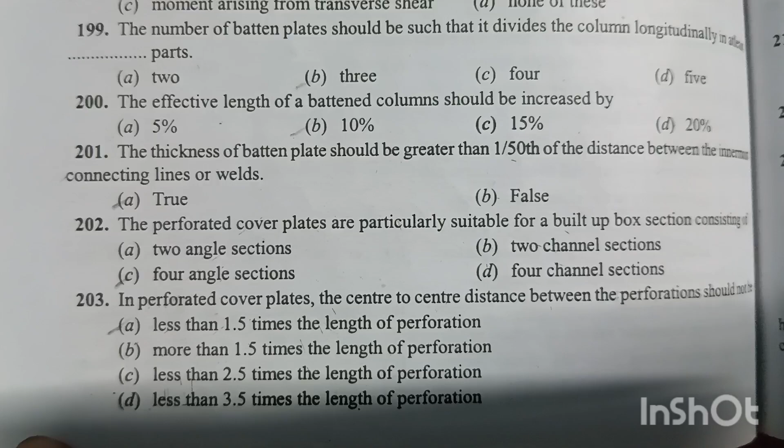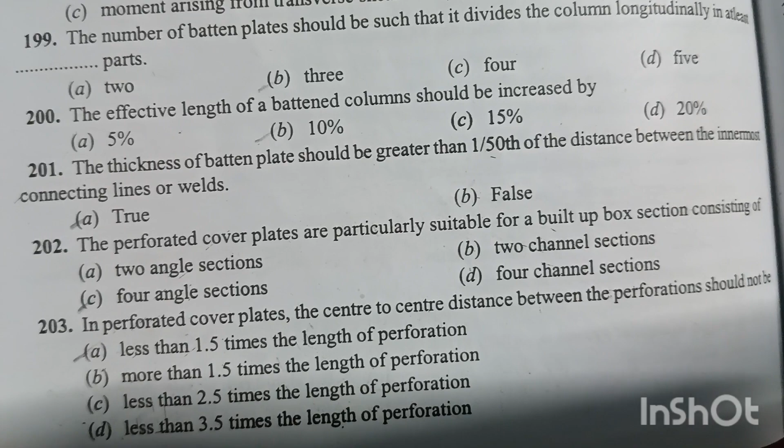Question number 201. The thickness of batten plate should be greater than 1/50th of the distance between the innermost connecting lines or welds. Option A is the right answer, true.

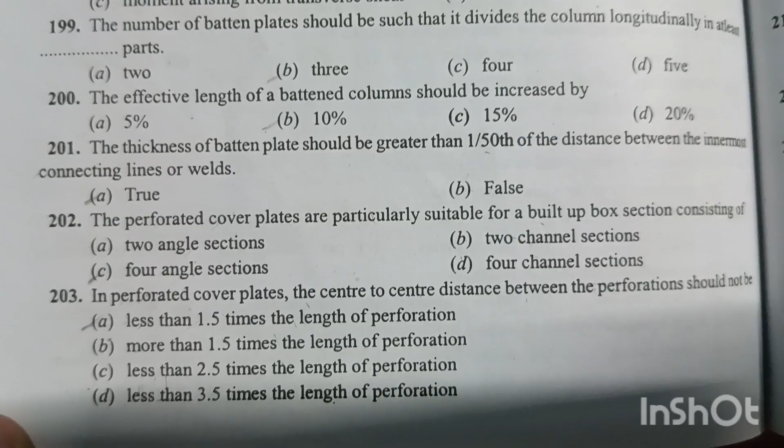Question number 202. The perforated cover plates are particularly suitable for a built-up box section consisting of 4 angle sections. Option C is the right answer.

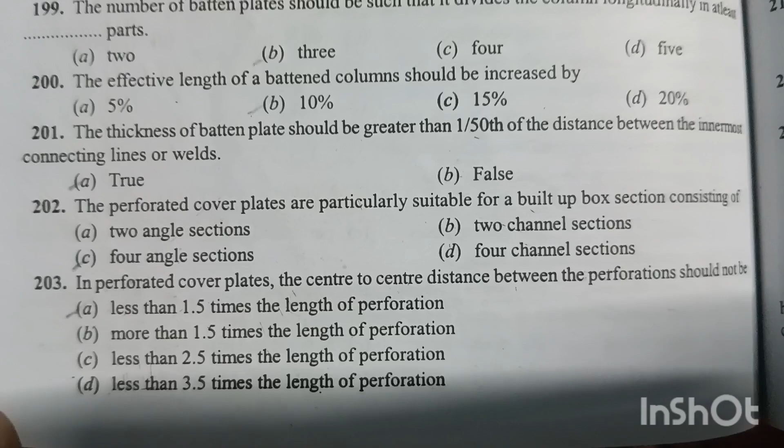Question number 203. In perforated cover plates, the center to center distance between the perforations should not be less than 1.5 times the length of perforation. Option A is the right answer.

Question number 204. An eccentrically loaded column is subjected to bending stress as well as direct stress. Option A and B both are correct, so option D is the right answer.

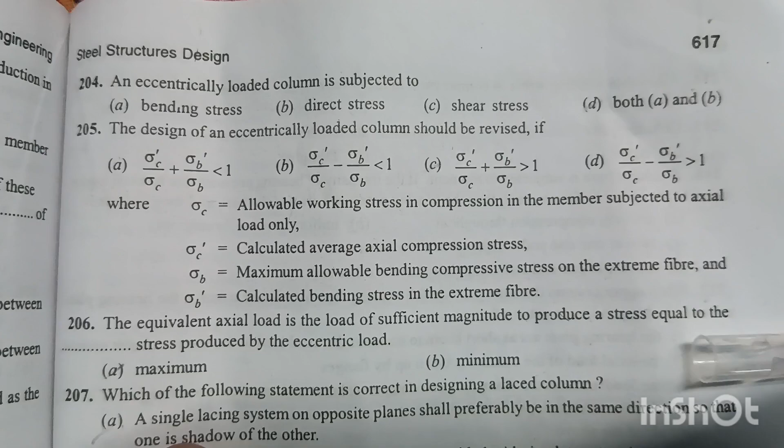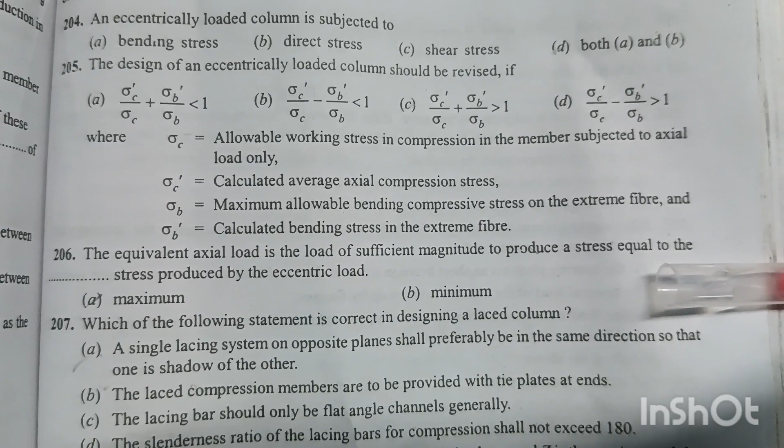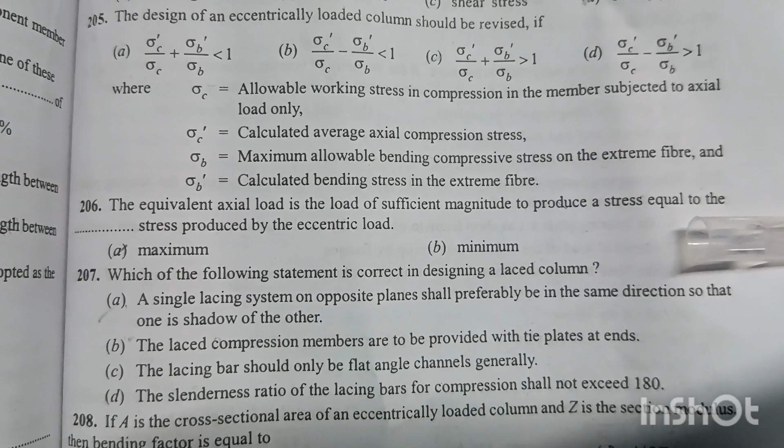Question number 205. The design of an eccentrically loaded column should be revised if sigma c dash divided by sigma c plus sigma b dash by sigma b is greater than 1, where sigma c is the allowable working stress in compression in the member subjected to axial load only, sigma c dash is the calculated average axial compression stress, sigma b is the maximum allowable bending compressive stress on the extreme fiber, and sigma b dash is the calculated bending stress in the extreme fiber. Option C is the right answer.

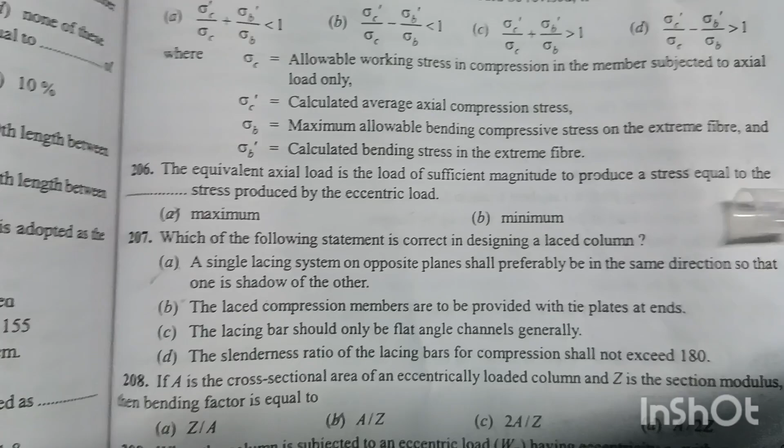Question number 206. The equivalent axial load is the load of sufficient magnitude to produce a stress equal to the maximum stress produced by the eccentric load. Option A is the right answer.

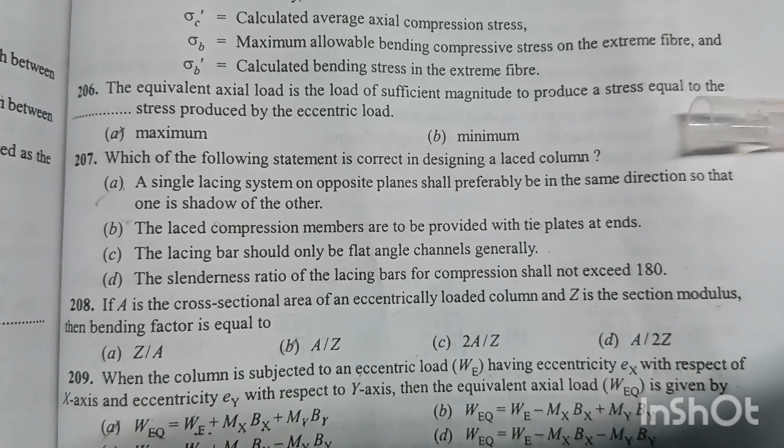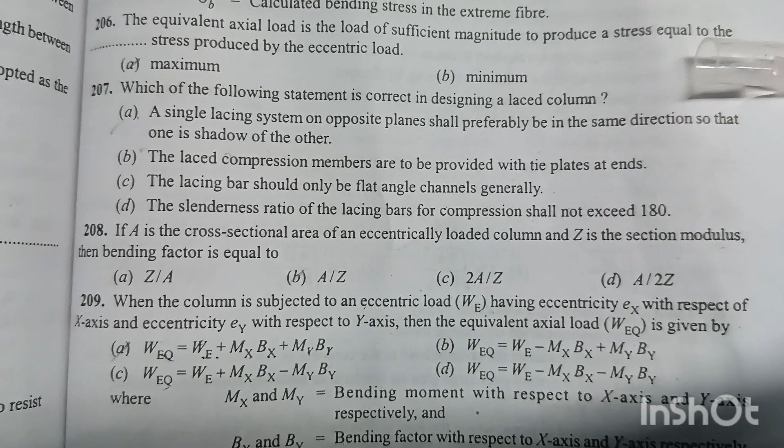Question number 207. Which of the following statements is correct in designing a laced column? Option A: a single lacing system on opposite planes shall preferably be in the same direction so that one is shadow of the other. Right. Option B: the laced compression members are to be provided with tie plates at the ends, to avoid slipping of the lacing bars. Right.

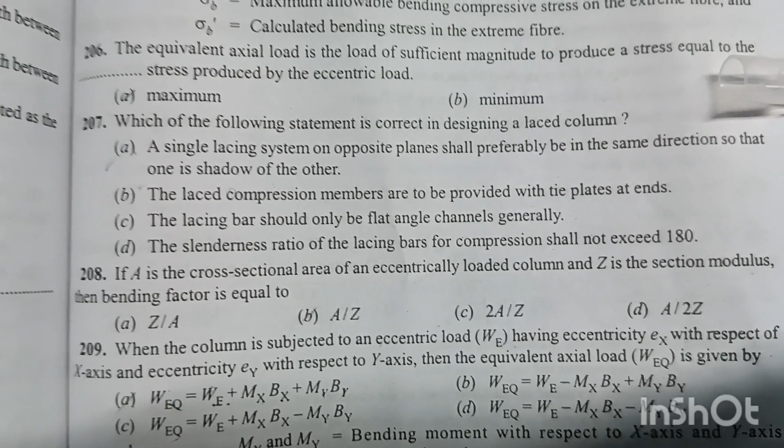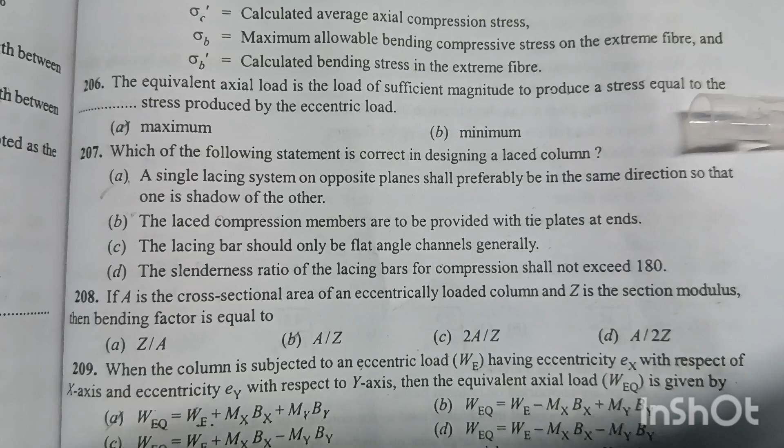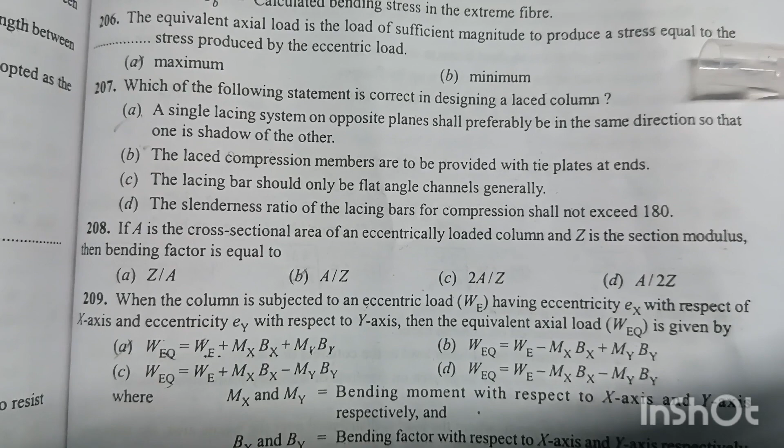Option C: the lacing bar should only be flat angle channel generally. No, it should be flat section, so C is wrong. Option D: the slenderness ratio of the lacing bar for compression shall not exceed 180. No, it shall not exceed 145. So both option A and B are correct.

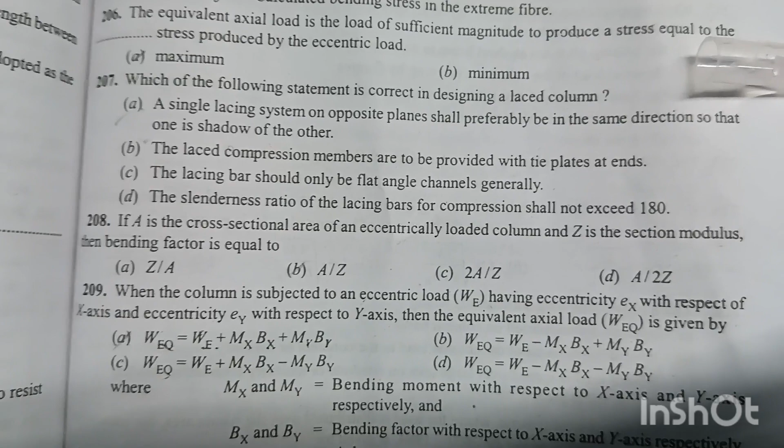Question number 208. If capital A is the cross-sectional area of an eccentrically loaded column and capital Z is the section modulus, then bending factor is equal to capital A by capital Z. Option B is the right answer.

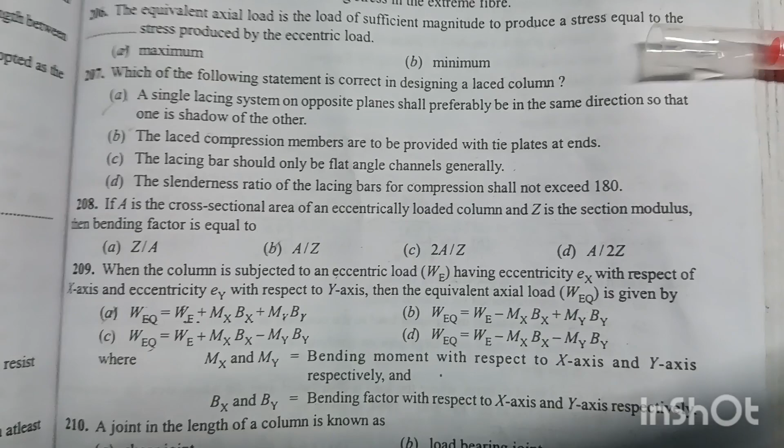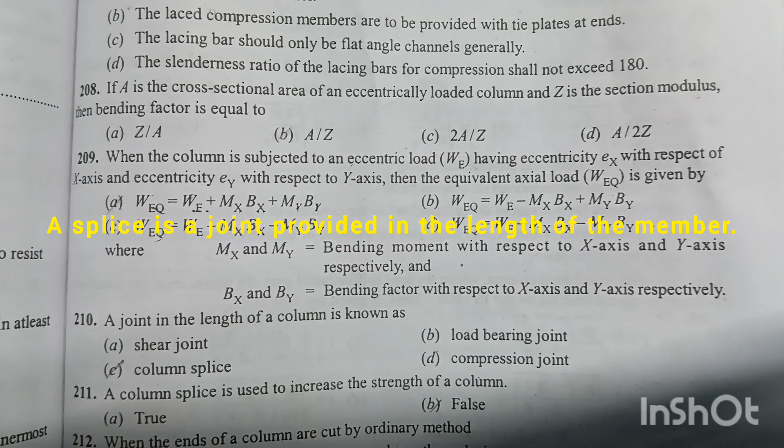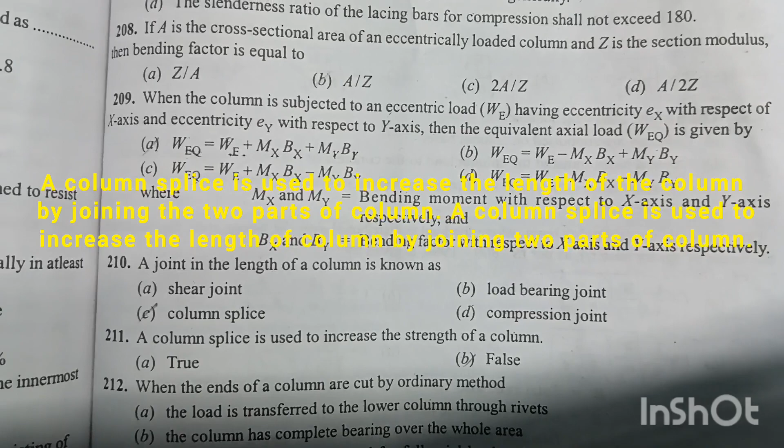Question number 209. When the column is subjected to an eccentric load capital WE having eccentricity EX with respect to x-axis and eccentricity EY with respect to y-axis, then the equivalent axial load WEQ is given by WEQ equal to WE plus MX BX plus MY BY. Option A is the right answer, where MX and MY are the bending moments with respect to x-axis and y-axis respectively, and BX and BY are the bending factors with respect to x-axis and y-axis respectively.

Question number 210. A joint in the length of a column is known as a column splice. Option C is the right answer.

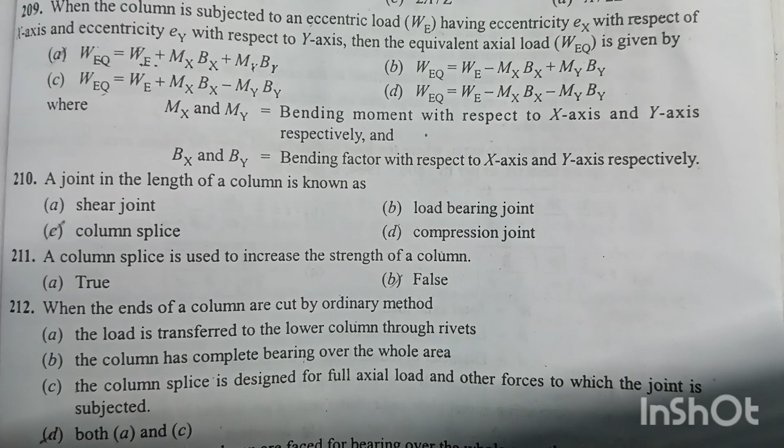Question number 211. A column splice is used to increase the strength of a column. No, a column splice is used to increase the length of the column by joining two parts. Option B is the right answer, false.

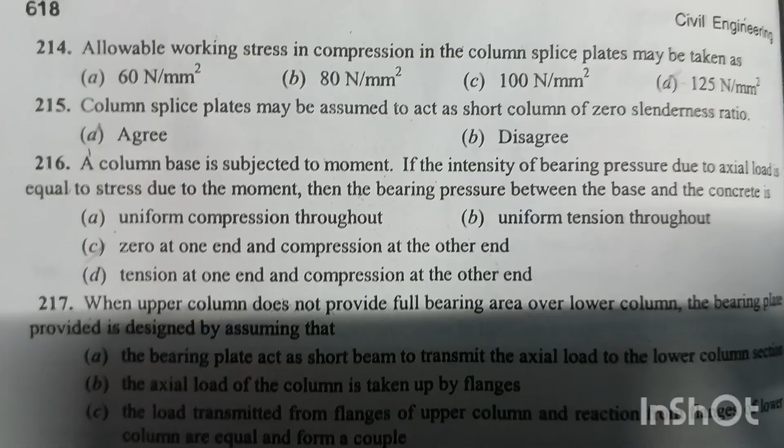Question number 212. When the ends of a column are cut by ordinary method, the load is transferred to the lower column through rivets, and the column splice is designed for full axial load and the other forces to which the joint is subjected. Both option A and C are correct, so option D is the right answer.

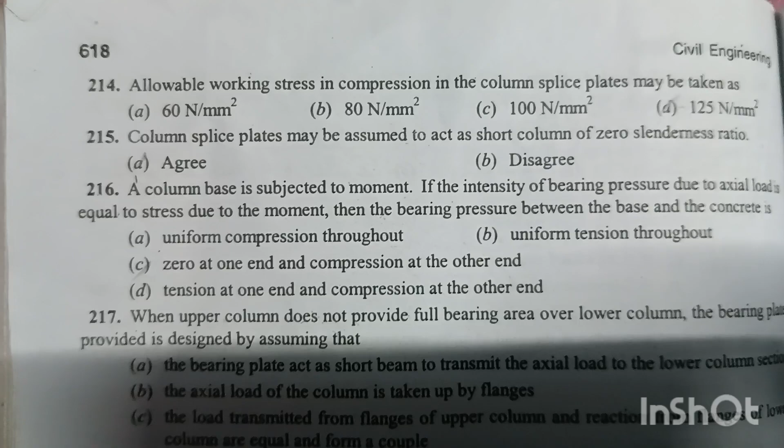Question number 213. When the ends of the column are faced for bearing over the whole area, the rivets essential to hold the connected members are designed for 50% axial load and other forces acting on the column. Option A is the right answer.

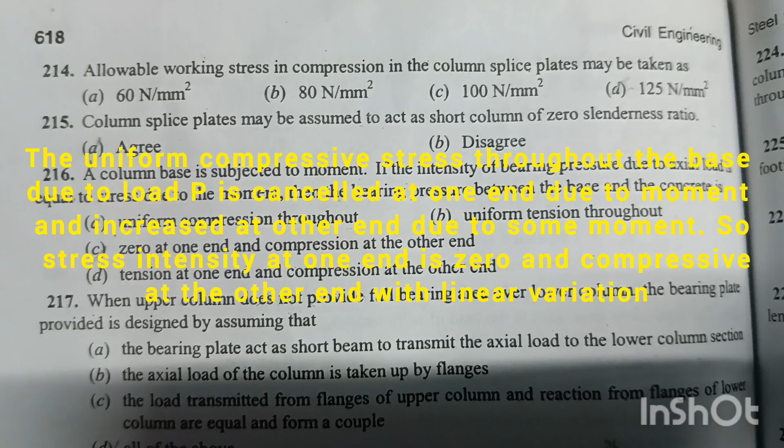Question number 214. The allowable working stress in compression in the column splice plates may be taken as 125 Newton per millimeter square. Option D is the right answer.

Question number 215. The column splice plates may be assumed to act as a short column of zero slenderness ratio. Option A is the right answer, agree.

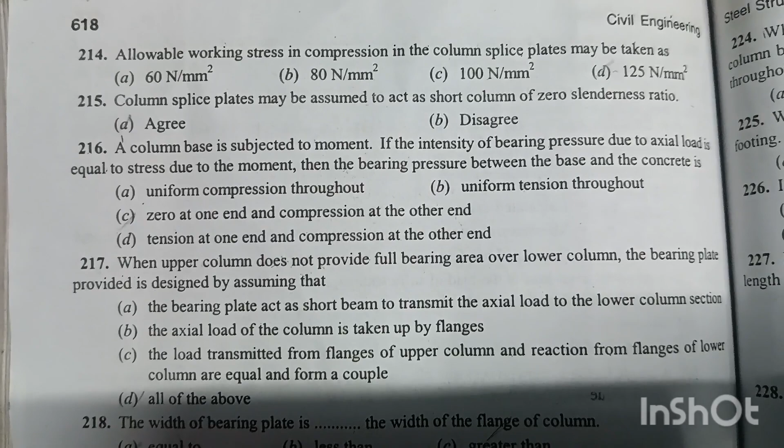Question number 216. A column base is subjected to moment if the intensity of bearing pressure due to axial load is equal to stress due to moment. Then the bearing pressure between the base and concrete is 0 at one end and compression at the other end. Option C is the right answer.

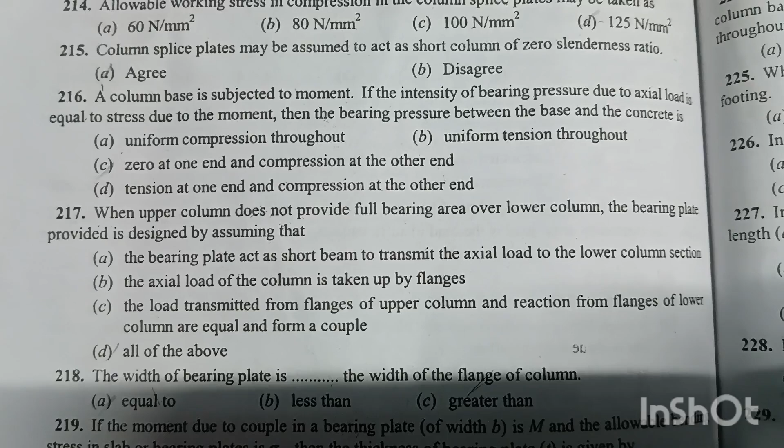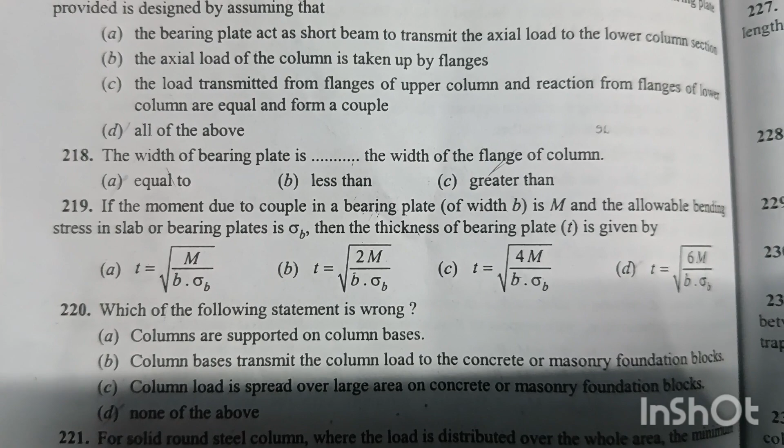Question number 217. When the upper column does not provide full bearing area over the lower column, the bearing plate provided is designed by assuming that the bearing plate acts as a short beam to transmit the axial load to the lower column section, and the axial load of the column is taken up by the flanges, and the load transmitted from the flanges of the upper column and the reaction from the flanges of the lower column are equal and form a couple. Option D is the right answer, all of the above.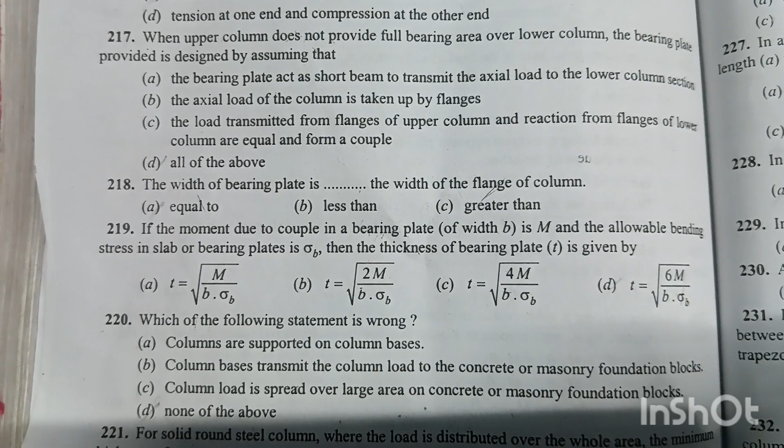Question number 218. The width of the bearing plate is equal to the width of the flange of the column. Option A is the right answer. Question number 219.

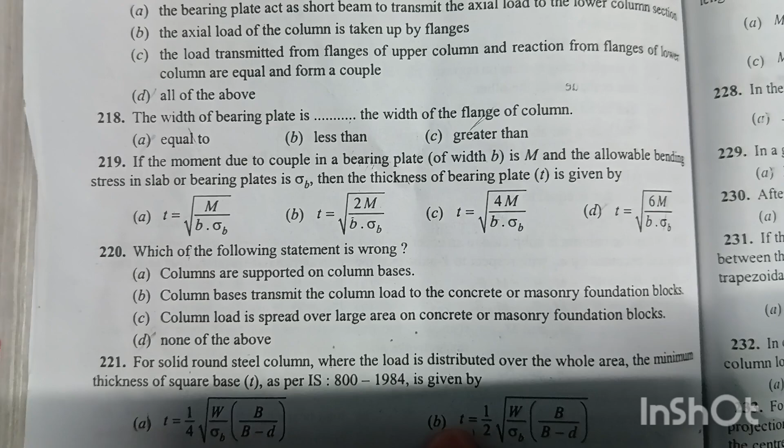If the moment due to couple in a bearing plate of width B is capital M and the allowable bending stress in a slab or bearing plate is sigma B, then thickness of the bearing plate small t is given by. Option D is the right answer: small t equals root over of 6 into M divided by small b into sigma b.

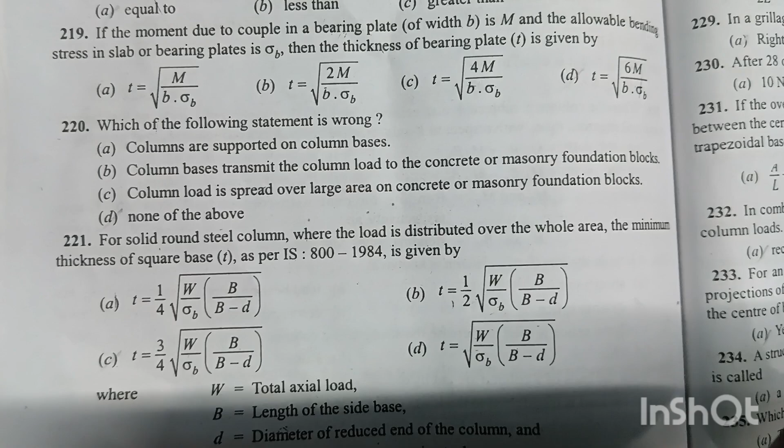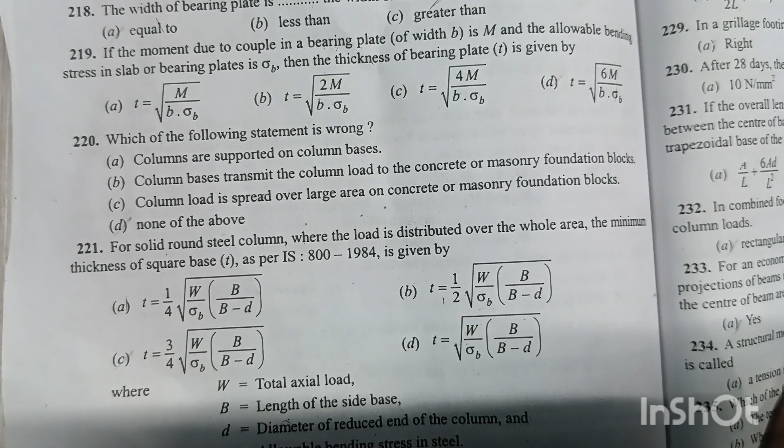Question number 220. Which of the following statement is wrong? Option A: Columns are supported on column bases - right. Option B: Column bases transmit the column load to the concrete or masonry foundation blocks - right. Option C: Column load is spread over large area on concrete or masonry foundation blocks - right.

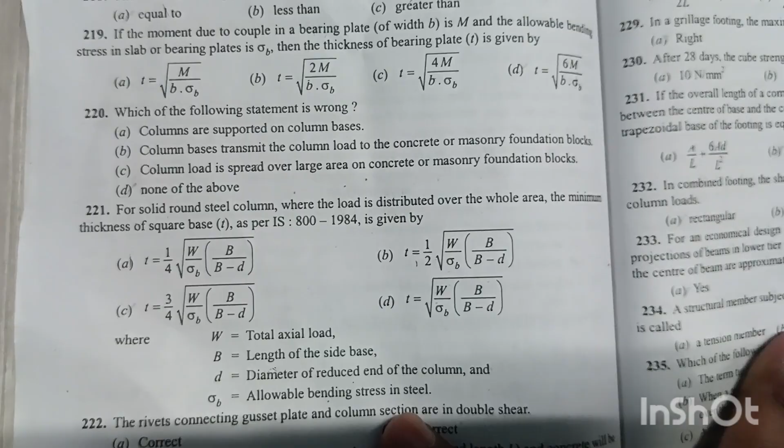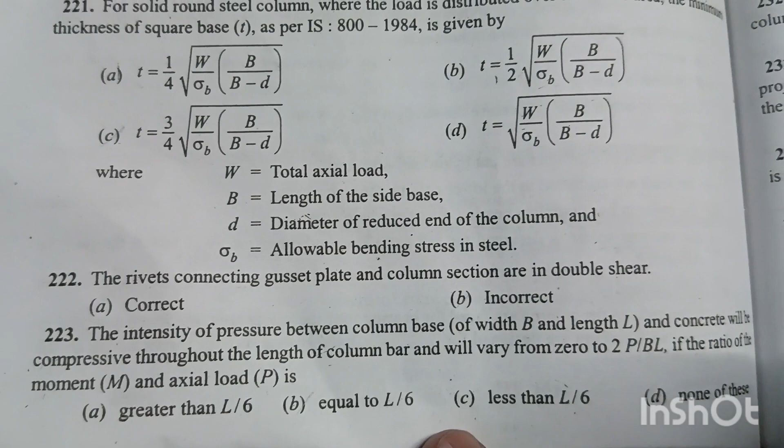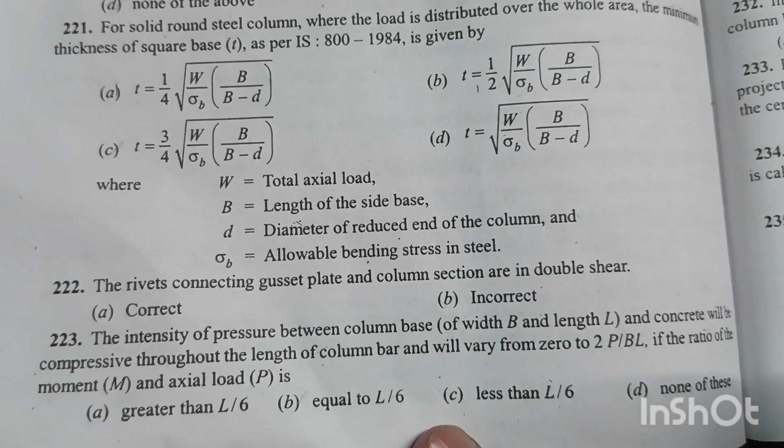Option D is the right answer, none of the above. Question number 221. For solid round steel column where the load is distributed over the whole area, the minimum thickness of square base small t as per IS 800 1984 is given by. Option C is right answer: small t equals 3 by 4 into root over of capital W by sigma b into within bracket capital B divided by capital B minus small d, where capital W is the total axial load, capital B is the length of the side base, small d is the diameter of the reduced end of the column, and sigma B is the allowable bending stress in steel.

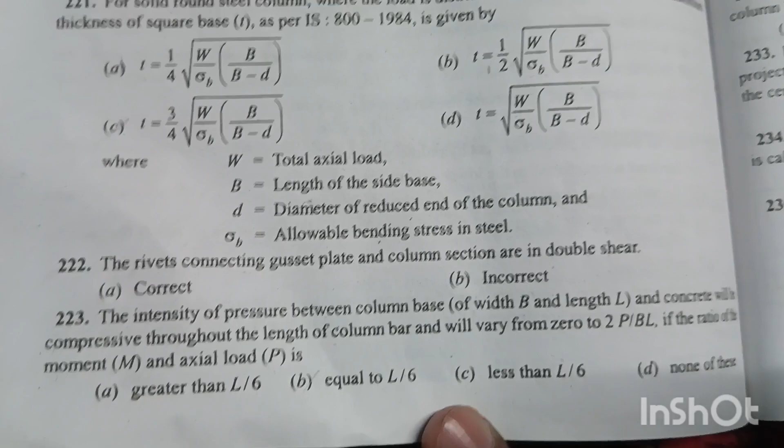Question number 222. The rivets connecting gusset plate and column section are in double shear. Option B is right answer, incorrect.

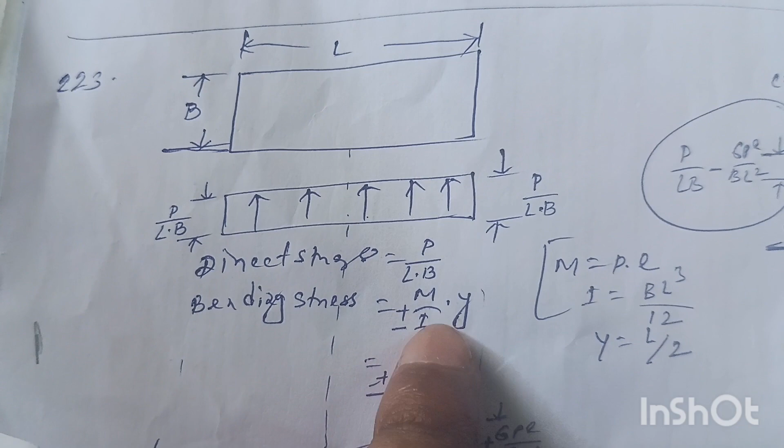Question number 223. The intensity of pressure between the column base of width capital B and length capital L and concrete will be compressive throughout the length of the column base and will vary from 0 to 2 into P divided by BL if the ratio of the moment capital M and axial load capital P is equal to capital L by 6. Option B is the right answer.

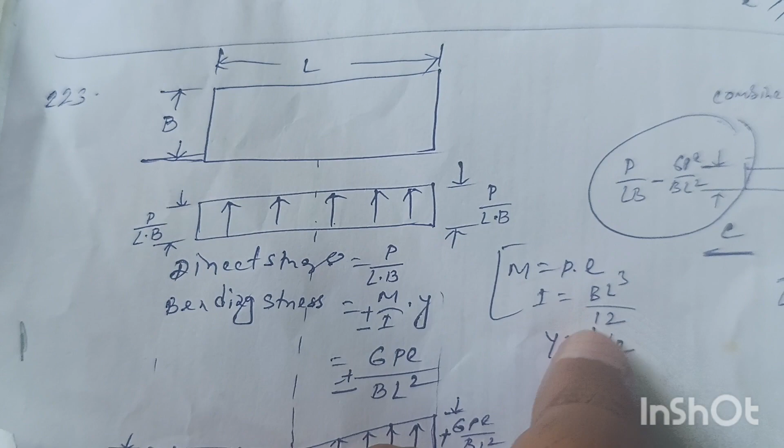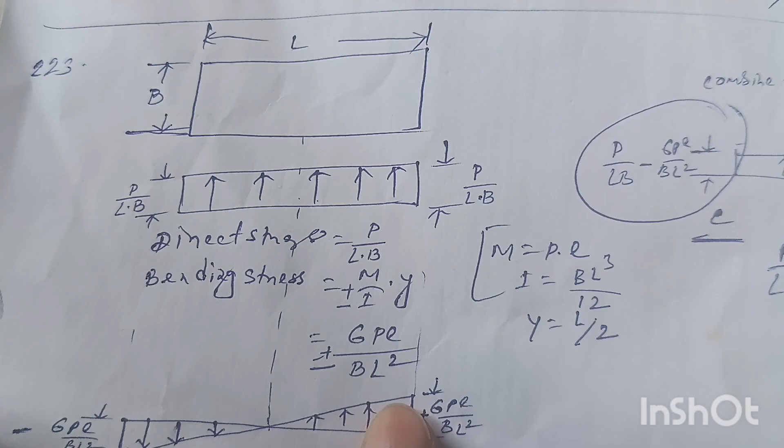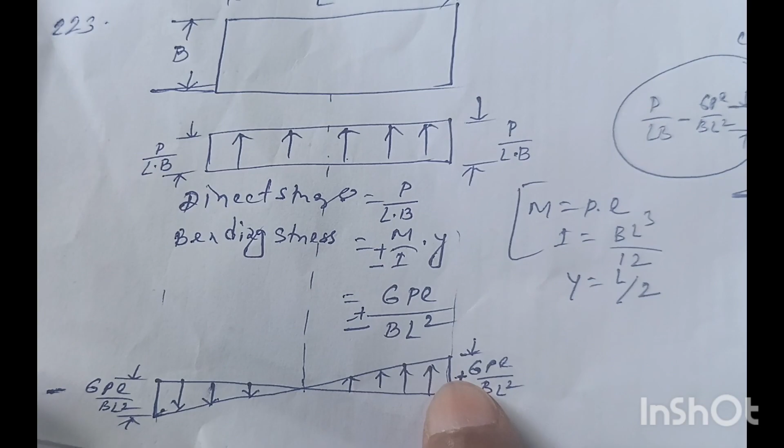Suppose this is the column base of width B and length L subjected to loading P. The direct stress will be P by L into B. The bending stress will be M into Y divided by I, plus minus. M will be equal to load into eccentricity, P into E, and I will be equal to B into L cube by 12, and Y equal to L by 2. So bending stress will be plus minus 6PE divided by BL square.

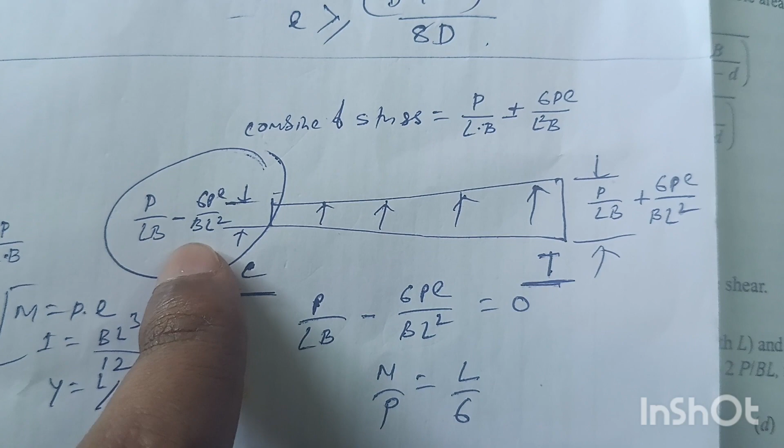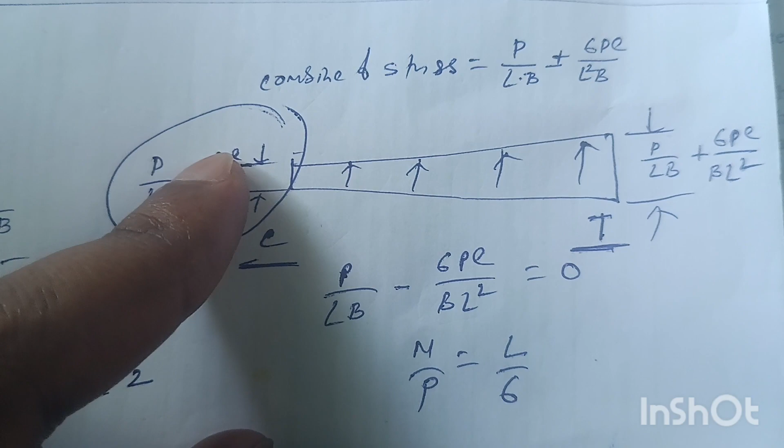If we draw the bending stress diagram, it will be like 6PE by BL square, minus here, and plus 6PE by BL square positive here. The combined stress will be P by L into B plus minus 6PE by L square B, and the diagram will be trapezium shaped. So here the stress value will be P by L into B minus 6PE by BL square, and here the stress value will be P by L into B plus 6PE by BL square.

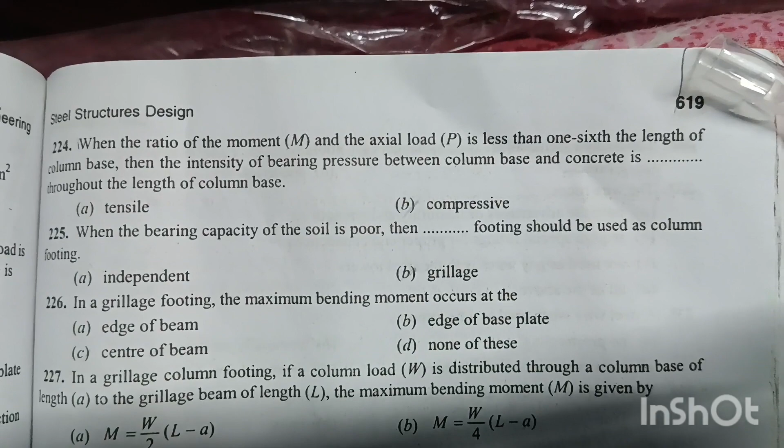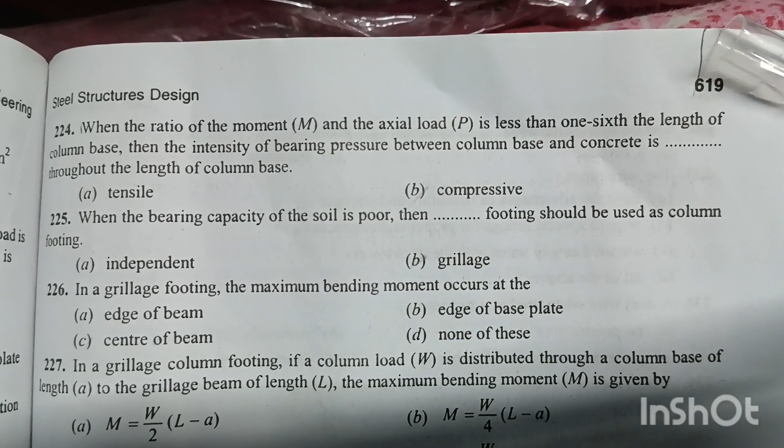Now it has been said that to make this stress zero, what will be the ratio of M by P? So this stress value is equal to zero if we calculate M by P equal to L by 6.

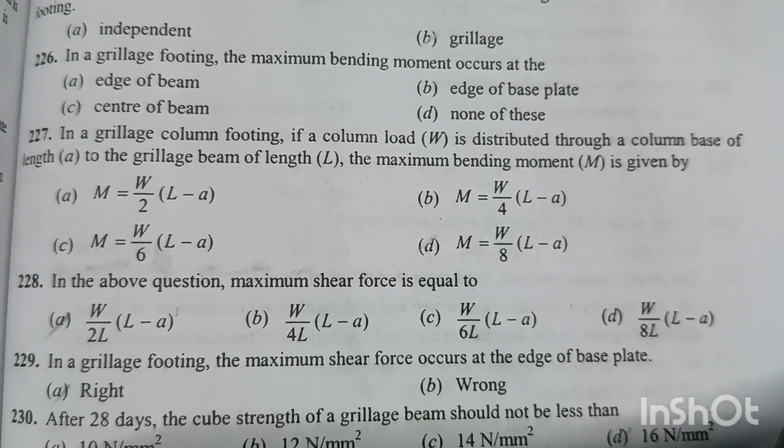Question number 224. When the ratio of the moment capital M and the axial load capital P is less than 1/6 of the length of the column base, then the intensity of bearing pressure between the column base and the concrete is compressive throughout the length of the column base. Option B is the right answer.

Question number 225. When the bearing capacity of soil is poor, then the grillage footing should be used as column. Option B is the right answer.

Question number 226. In a grillage footing, the maximum bending moment occurs at the center of the beam. Option C is the right answer.

Question number 227. In a grillage column footing, if a column load capital W is distributed through a column base of length small a to the grillage beam of length capital L, then the maximum bending moment capital M is given by. Option D is the right answer: capital M equals capital W by 8 into within bracket capital L minus small a.

Question number 228. In the above question, maximum shear force is equal to. Option A is the right answer: capital W by 2 into capital L into within bracket capital L minus small a.

Question number 229. In a grillage footing, maximum shear force occurs at the edge of base plate. No, maximum shear force is at the edge of the loading. Option B is the right answer, wrong.

Question number 230. After 28 days, the cube strength of a grillage beam should not be less than 16 Newton per millimeter square. Option D is the right answer.

Question number 231. If overall length of a combined footing is capital L and area of base footing is capital A and the distance between the center of base and the center of gravity of the base is small d, then the smaller width small c for the trapezoidal base of the footing is equal to capital A by capital L minus 6 into capital A into small d divided by capital L square. Option B is the right answer.